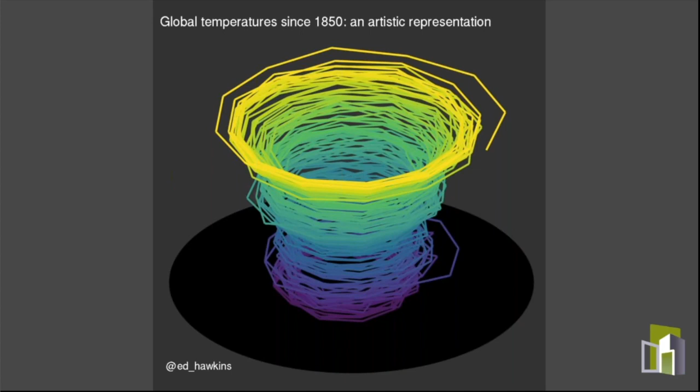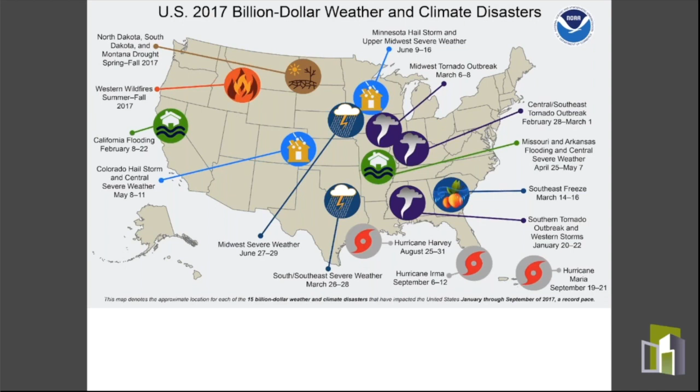And I'm going to start with the bad news. It's no secret that we've got ecological crises bearing down on us, a whole number of them in different ways. Global temperatures, for example, are almost literally spiraling out of control, as this amazing graphic representation illustrates. And the implications of this show up differently in different places. If anyone's calling in from Colorado, you may be suffering from the impacts of the horrible fires going on there. Really sorry about that. Seems like there's always something terrible going on somewhere, and more often, climate change is either a contributing factor or a factor making things worse.

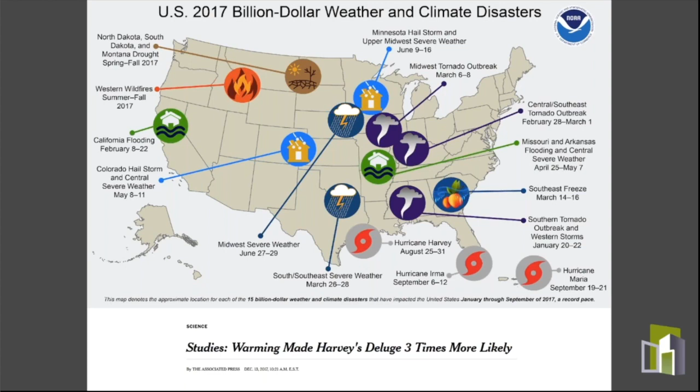This is sort of the pattern we're seeing these days: the climate is changing rapidly, and things that used to happen before are now happening more, faster, bigger, in ways that we weren't necessarily prepared for. And it really is happening all over the country, and there are very few parts of the US at least that are safe from one or multiple versions of these threats.

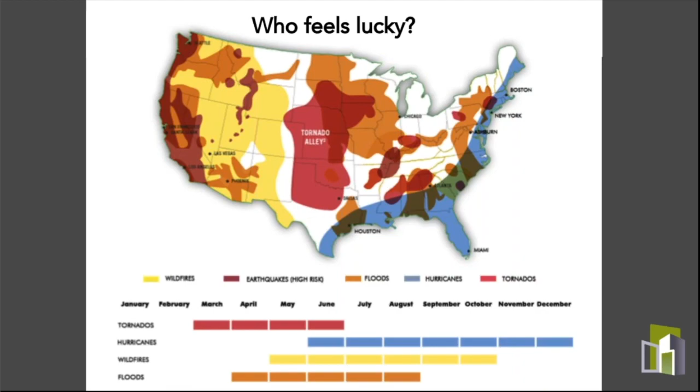And the threats are not just actual natural disasters and immediate physical harm, like drowning in a flood or getting injured, burned in a fire, but there are health impacts that are coming from all of these changes as well, whether it's disease vectors that are moving, whether it's extreme temperatures in areas where people were not used to those, or ozone impacts due to changing temperatures. All of these things are affecting air quality, affecting health in a whole bunch of different ways.

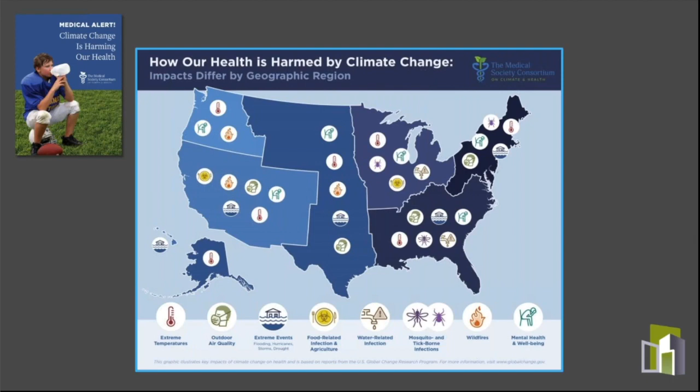And it all has to do with the fact that the kind of change that used to happen in geologic time over thousands and tens of thousands and millions of years is now suddenly happening within the span of a few years and decades. And our ecosystems and our bodies are having trouble keeping up. So that's the bad news.

The good news is that there's a lot that building materials have to do with both the causes and the opportunities for improvement in this world. And I like to think of the opportunities here in these four quadrants. I'm going to go into detail in each of these and just explain what's covered by each of these. Because if you cover all four of these, you pretty much are doing whatever can be done with materials to address human health and ecological and social impacts.

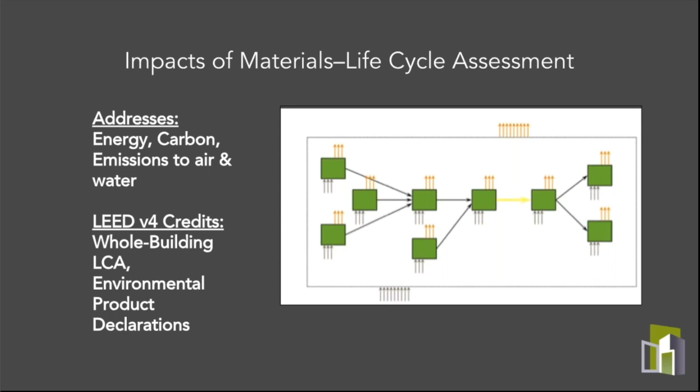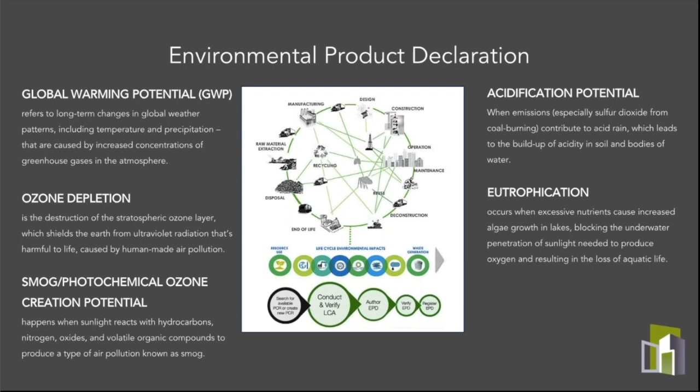So life cycle assessment really focuses on energy, carbon, emissions to air and water. And within LEED version 4, it's picked up through whole building LCA, whole building life cycle assessment, and environmental product declarations, which are a key part of what we're going to talk about here in terms of LEED v4 and product opportunities. So these are the impact categories that EPDs cover. We're not going to go into detail about all of that right now, but there's more where that came from.

One of the interesting patterns that you see as you look at this is we're often talking about carbon or climate change, carbon as a proxy or as a stand-in for climate change impacts more broadly. And in fact, in most cases, carbon or climate change impacts work as a proxy for all these other environmental impacts that are covered by life cycle assessment as well. So carbon works pretty well.

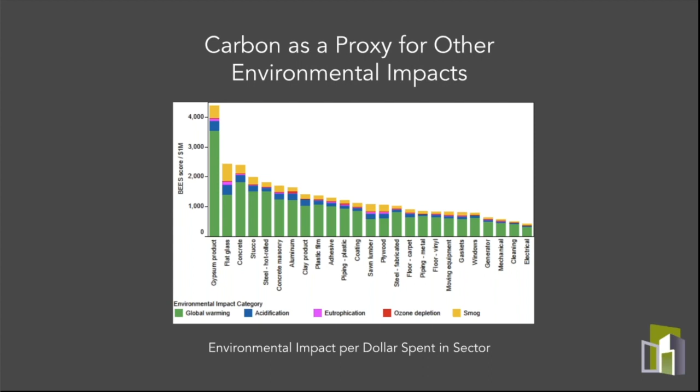Sometimes we interchangeably talk about carbon and LCA impacts, and it's not an exact one-for-one match, but generally they track pretty closely, which is handy. Now, it used to be that we didn't think that much about building materials in terms of climate change and carbon impacts, because we thought the real issue is in operating energy and the fuels that are burned to operate our buildings. But that's no longer the case for a couple of reasons.

Primarily because buildings are getting more efficient, and especially if you're watching this webinar, you're probably tied into the green building space, where leaders are driving towards net zero buildings. As we drive operating energy use down further and further, the embodied energy piece, which hasn't changed, looms larger as a part of the overall puzzle. Actually, in some cases, it has changed, right?

Because in order to drive operational energy down, usually we're adding layers of insulation. In order to add more insulation, we're adding framing, we're thickening up the envelope, we're adding photovoltaic panels, we're changing up systems. So in a lot of cases, we're actually growing that embodied energy piece in order to shrink the operating energy. And we have to pay attention to the trade-off there, because we need to cover both.

Embodied energy is important not just because it's the piece that's left over after we drive down operating energy, but also because there's a time factor here. Embodied energy is all about energy that's in products and materials that go into a building. All of that carbon is released right up front, when we're building the building, which means there's a huge plume of carbon happening right then, as opposed to the operating energy, which is released gradually over the life of the building.

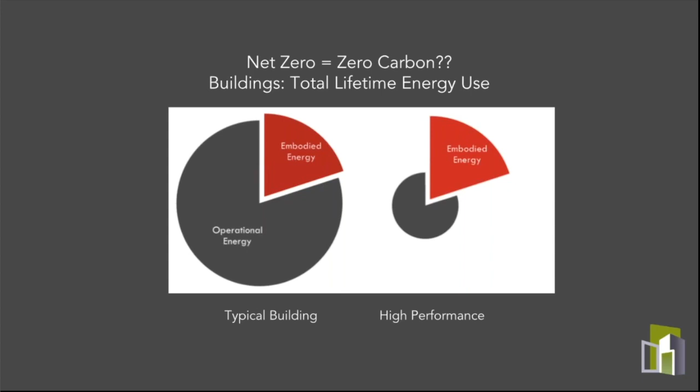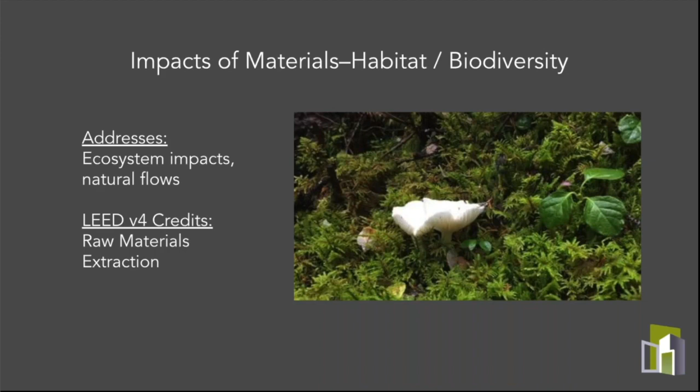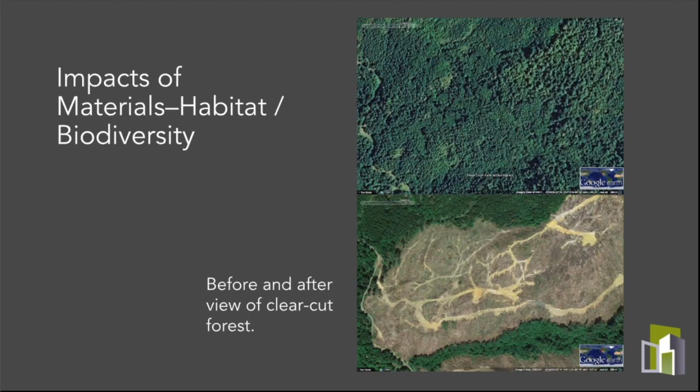Looking next to habitat and biodiversity, it's kind of self-explanatory: ecosystem impacts, natural flows. This is covered primarily in LEED under the raw material extraction credit. As an example, large clear cuts are a huge impact on biodiversity in that ecosystem, disruptive to habitat. We're seeing tremendous extinction across the planet, a combination of habitat loss and climate change impacts. So this is one piece of that puzzle, and for materials coming from places rich in biodiversity, this is definitely something to pay attention to.

Moving on to health. As I mentioned, health is tied to climate change, but also more directly tied to building materials through hazardous substances that might be in those materials. Depending on the system or program, sometimes we're also paying attention to exposure. In LEED version 4, there's a credit on material ingredients, and there's low emitting materials as a credit in the indoor environmental quality section. So it's useful to think about the ways potentially harmful substances can move from building materials into our bodies.

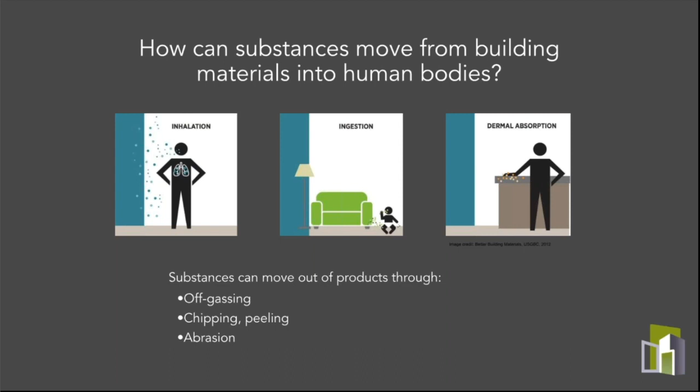Breathing them is big, ingesting them, especially toddlers playing on a carpet or chewing on a windowsill, right, with lead poisoning, and just through your skin. So paying attention to how these things are released into the environment from all these different sources, and how they can get absorbed or ingested into humans for those direct human health impacts is a key piece of what we're looking at in terms of these materials.

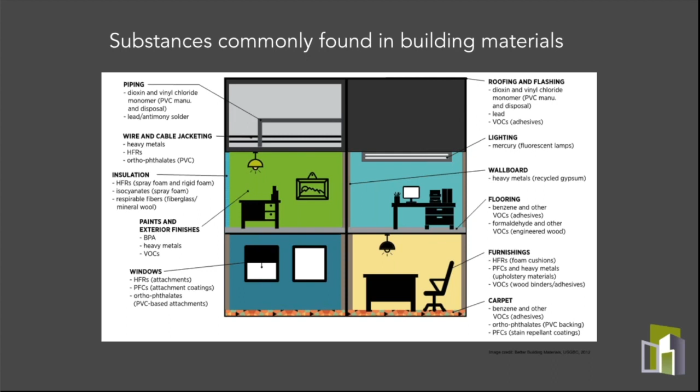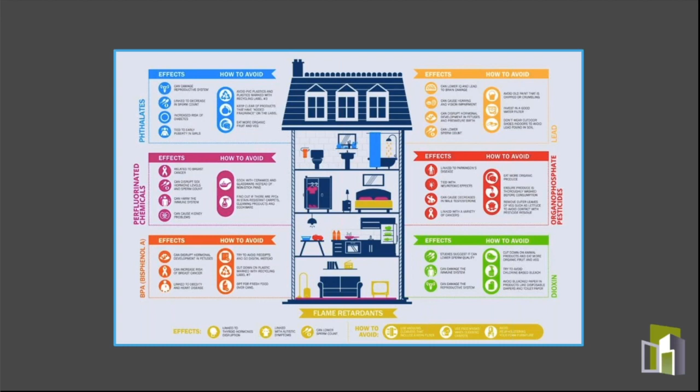So this is a master overview of where some of these hazards are found in building materials. You can also look at them in terms of categories: what are these categories of hazards, what effects each might have, where they show up in buildings and how to avoid them. So that's the context for the health piece. The final quadrant of these four that we're using to frame this whole picture is the story of social equity.

And so this is where we're considering things like fair labor practices, like, what are workers exposed to and how well are they protected, and what about corruption and that kind of thing in the workplace. LEED version 4 doesn't actually have a credit that addresses this in the core rating system, but there are a series of pilot credits around social equity, including one that's specifically about social equity in the supply chain, which is, of course, the supply chain is the materials and product supply chain.

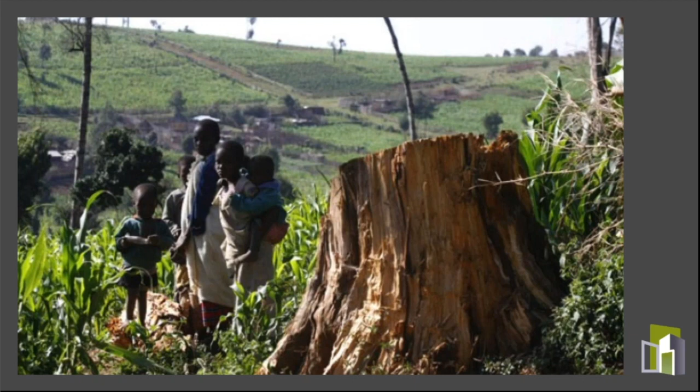So strongly encourage you to take a look at that as a way to start to think about this whole social equity piece of these issues and where they come from, because just in the same way as there are ecological impacts to the materials we use, there are social impacts to these materials and where they come from. And it's important to think about those and try to get a handle on how can we work with and pay attention to and then mitigate those as we look at

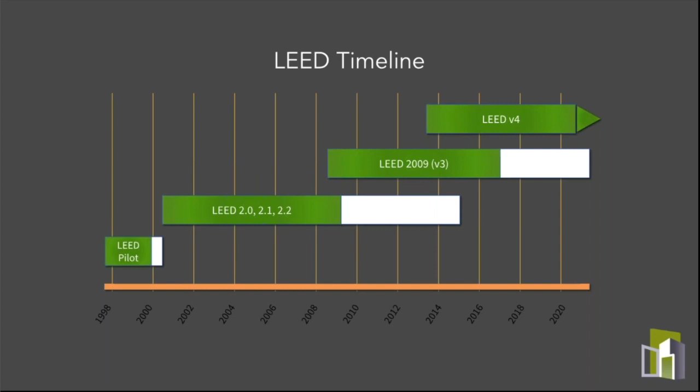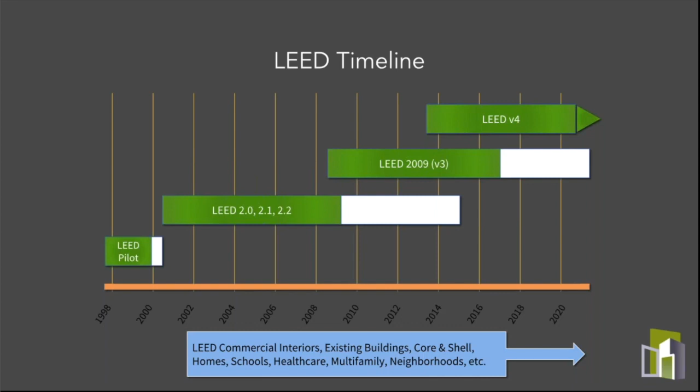Started out as a pilot in 1998, moved into a full rating system in 2000, and through all of the 2000s and into about 2013 with LEED version 2 and then LEED 2009 or V3, the materials and resources credits really didn't change very much. Through that time, we also had a whole bunch of additional market sector specific and variants on LEED introduced. So all of that's very much part of the mix as well. But throughout that entire initial decade and a half of LEED, in terms of products and materials, we were pretty much focused on recycled content and certified wood and regional materials and maybe rapidly renewable materials.

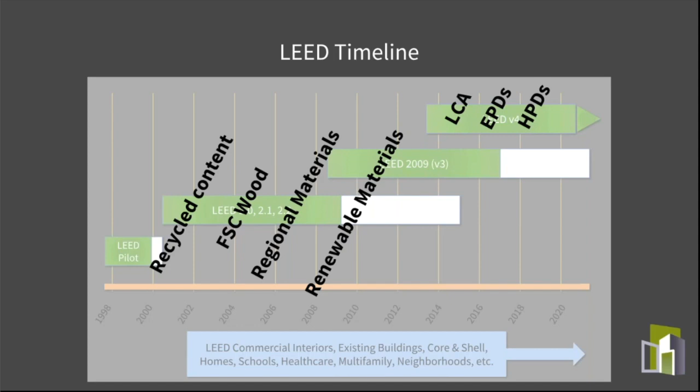With LEED version 4, all of that has changed. Now we have this kind of alphabet soup of new terms and concepts and things to think about. Life cycle assessment, environmental product declarations, health product declarations. That's what we're going to be going into some more detail here as we continue with this program.

And so the particular credits in LEED that cover these, there's 3 that fall under that umbrella of building product disclosure and optimization. That's the environmental product declarations, sourcing of raw materials, and then material ingredients. Those are the 3 BPDO credits. And then within indoor environmental quality, the low emitting materials credit is very much a part of this mix as well. And these are the credits that you have to pay attention to as you're looking to use LEED version 4 as a program.

As it turns out, these credits are not all created equal in terms of how easy they are to achieve. So we at BuildingGreen created this cheat sheet to help guide you through this. And what you'll see here is each of those BPDO credits, the building product disclosure and optimization, are a column here. So environmental product declarations, this first column, raw material extraction, the middle column, and material ingredients, the last one. And each of those credits have 2 points, one for disclosure and one for optimization.

But when you look at what you have to actually achieve in order to earn those points, there's some low-hanging fruit here. There's some relatively easy credits to achieve around disclosure for EPDs and disclosure for material ingredients, and also in the area of optimization for raw material extraction. So some pretty achievable targets there.

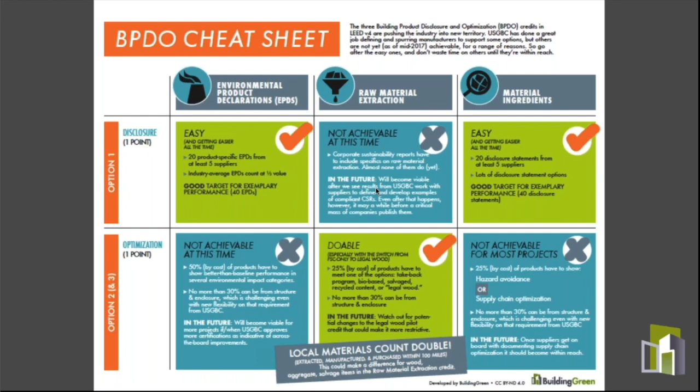But I also want to point out that LEED is not the only game in town. There's other programs that are really offering great guidance in terms of products and materials choices. So the Red List from the Living Building Challenge has guided a lot of, especially the really advanced and the more progressive owners, clients, and designers. And so essentially the Red List is a list of substances that are found in building products that you need to avoid in your project.

Living Building Challenge has other material-related imperatives as well, things like certified wood, things like the distance, right, for where these things come from. All of that is part of the equation as well. So there's a great framework there. We're not going to go into as much detail about that, but very much a part of the mix in terms of the overall product vetting challenge.

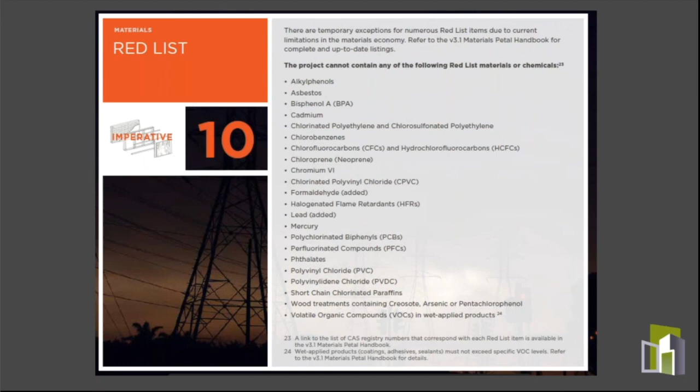And then another rating system that has been getting a lot of attention the last few years is WELL. And what's interesting here is that until last week, WELL did not have a materials category. It had a smattering of materials-related features. So things that are called credits in LEED are called features in WELL. It had a smattering of materials features scattered throughout the different categories or concepts in WELL, in particular air and mind.

Now, WELL version 2 just came out in pilot last week, and lo and behold, there's now a materials concept in WELL. And so they've consolidated all those materials-related features, whether they're preconditions that you have to meet or optional credits. And a lot of these do track pretty closely with things that are already in LEED. Some of them tie into Living Building Challenge, but there are also some variances there that you need to pay attention to. So stay tuned as we work to figure all this out.

And just want to make the point that we have to work on this together, right? This is the kind of thing where the crowdsourcing and collaboration goes a long way. If we take this us versus them approach to addressing these challenges and solving these problems, we're not going to get as far. So with that, I'm thrilled to turn it over to Anne to walk us through some specifics on getting to 20 products for those easy LEED credits.

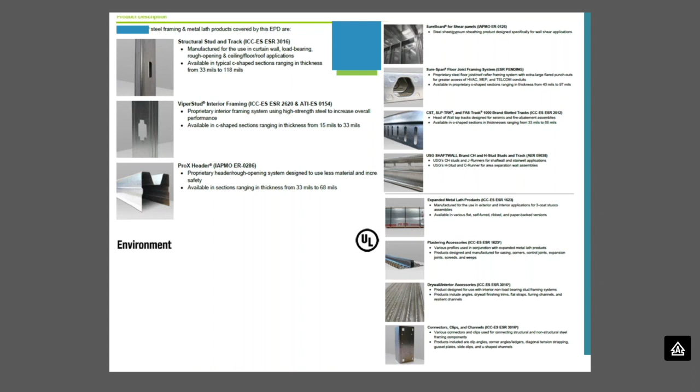It covers connectors. So there's a good chance that you're going to hit your limit on manufacturer in this category because you're going to have studs and headers and drywall bead in every single job that you do. So you're probably going to get to 5 of manufacturer X in the metal stud category, and then you can't use any more because you're limited to 5 per manufacturer in the LEED rating system. So disclosure in metal stud is a yes, and it's going to come with 5.

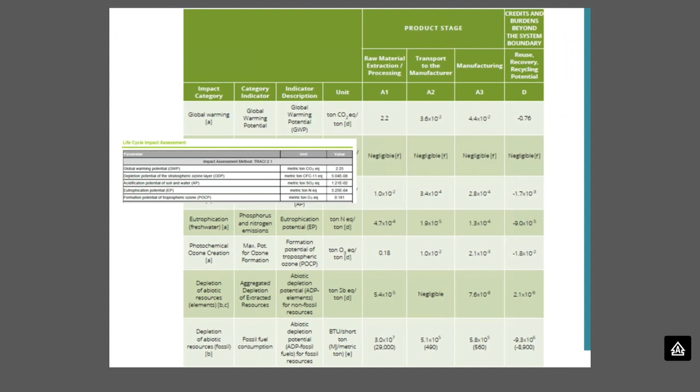If we talk about optimization, this is the guts of the EPD that's the generic EPD, and we could spend a lot of time talking about the specifics from various manufacturers, but here's what I learned. I compared 4. 2 of them were actually worse than the generic, which I didn't realize was physically possible, but apparently it is. And 2 of them were better than the generic, but not better enough in 3 categories, which is what's required by the LEED optimization credit.

So the short version of all this is, if you want to talk about optimizing from an environmental standpoint, when you're talking about things like metal studs, you should be talking about running a whole building life cycle analysis. And that's not a credit we're talking about today, but that is something we should all be doing regardless.

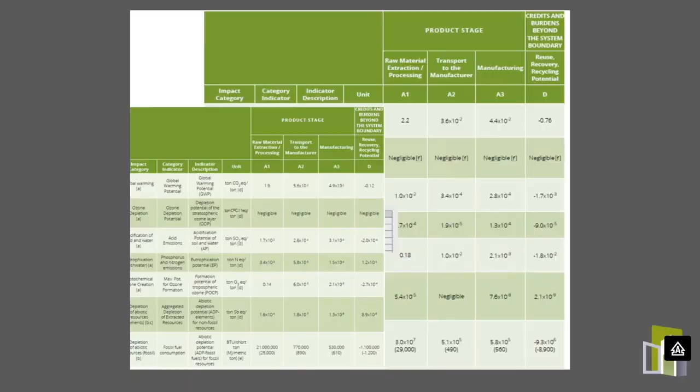The second topic in disclosure in LEED is material ingredients. In the category of metal studs, there are a number of manufacturers that have HPDs for metal studs. And again, these HPDs don't just cover the stud, they cover the tracks, the clips, the drywall beads. So when you see one, you have to remember, oh, this covers multiple products. So again, in terms of disclosure on metal studs, that's going to be a yes, and then you're going to get multiple products out of that.

Now, the thing to remember is 1,000 ppm is a disclosure level that is at a higher altitude. You see less. 100 ppm digs you far deeper, gets you more information. So the easy thing to remember is the smaller the number, the more information that you get. But I wanted to look more specifically at this, and before I did that, I wanted to make sure everyone had a basic understanding.

All these things have an LT1 to LT4 or LT-UNK. LT1 is the worst, very hazardous, avoid, and these are GreenScreen List Translator. LT stands for List Translator, and then LT4 is inherently low hazard. LT-UNK is unknown hazard, don't know enough.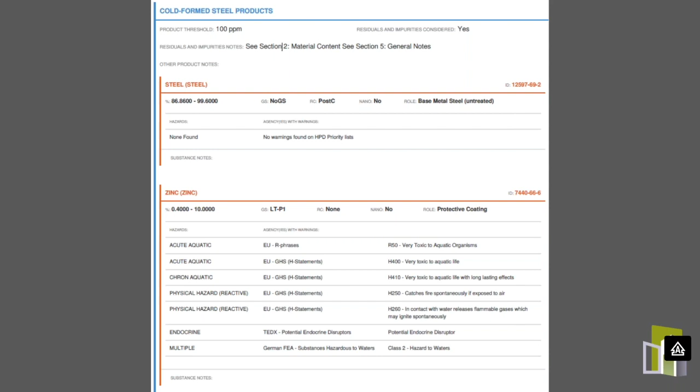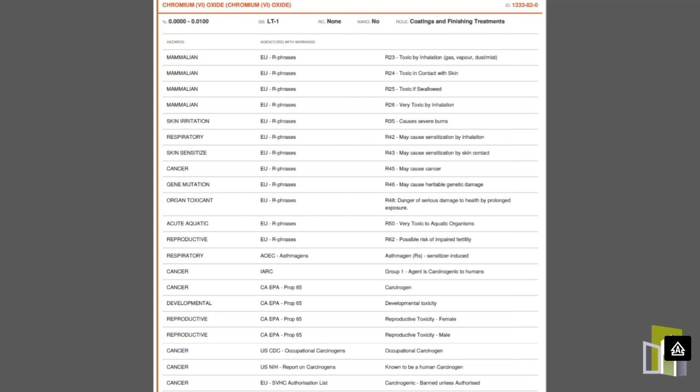What was interesting about this, though, was when you dug into the 100 ppm, there were so many more things. And this was the one that really got to me, chromium oxide. So chromium oxide is an LT1, and as you can see, it has pretty much every toxin known to man. It has a mammalian toxin, it's a carcinogen. It's an aquatic toxin, it's a developmental toxin, it's a reproductive toxin for both boys and for girls, and it goes on and on. There are 3 pages of this thing for just one chemical.

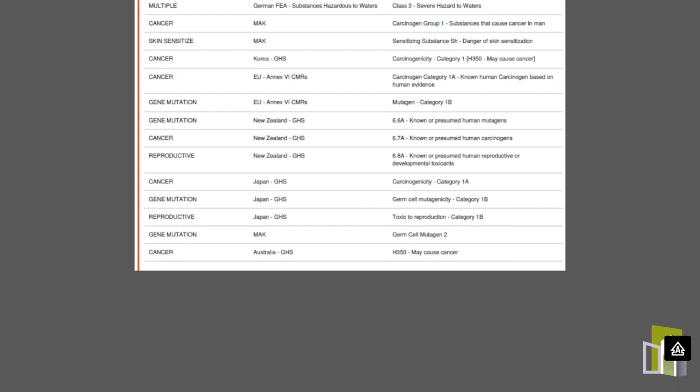And then you get to the end summary, which is products produced by MBA are classified as non-hazardous per OSHA. Processes such as cutting, welding, or brazing to modify or install the product can result in hazardous and/or combustible dust or fumes.

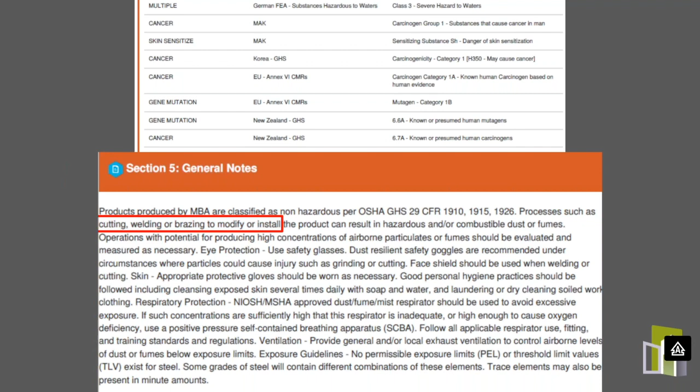So I guess our takeaway from this is truly it's okay to purchase metal stud and have them delivered to your job site, but you probably shouldn't install them because that will produce hazardous and/or combustible dust or fume. So I joke a little bit, but generally under metal stud, we should be thankful, and we should congratulate these

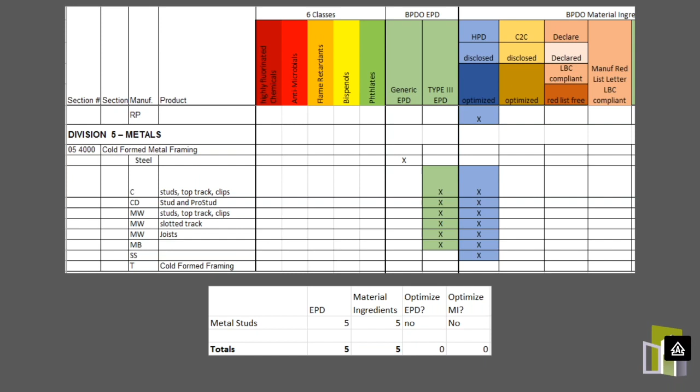manufacturers. There are 4 specific manufacturers that provide both a Type 3 EPD and an HPD, which allows us to get under metal studs. I think you're going to get 5 products under the EPD category and 5 products under the material ingredient category, which means that in one product, before we even get started, we are already 25% of the way to getting ourselves a LEED credit.

My next category is gypsum board. We now have metal stud wall. We got to put something on it. Gypsum board, again, have been leaders in this category. There are industry-wide generic EPDs available for glass mat sheathing products, for joint compound, and for Type X gypsum board. All three of those products are going to be in virtually every single project any of us do. Those are each worth half a point. We just got another 1.5 points in the EPD category.

But once the generics come out, all the manufacturers follow suit. There are multiple EPDs available in multiple products. There are a lot of Type X out there, which is the fire rated, the 5/8 inch gypsum board, which is what we use in most of our projects. 2 of those will allow you to optimize. They are that much better than the generic. They beat the generic requirements by 10%. So again, gypsum board, you're talking about getting more things.

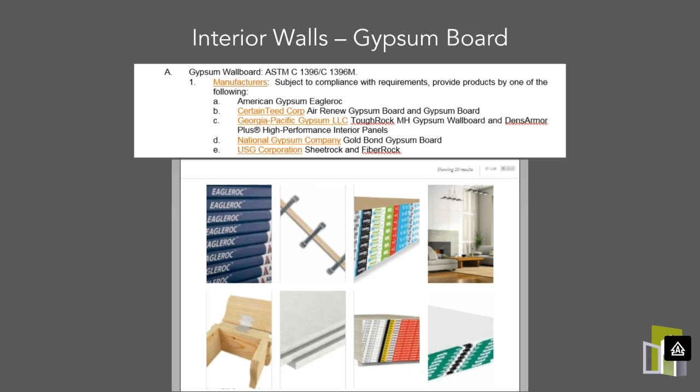When I talk about the health impacts of gypsum board, my first step is to go to BuildingGreen's website, because they have such great information on health impacts on their BuildingGreen approved portion of their website. So if you go there on designer pages, you can see a lot of great information, and those are my selections generally for what I use for gypsum board in my projects. But I also wanted to dig in to see, beyond the fact that I think these are good products and well worth using to just clean up our industry, whether we can get credits for these.

Again, in the category of gypsum board, there's a lot of HPDs available, and there are HPDs available for multiple different products. You can get HPDs for Type X gypsum board, which is your fire-rated gypsum board, for your shaft wall, for sound-insulated gypsum board, for impact-resistant gypsum board, and there's some products that are air cleaning. There's a bunch of different products. So again, you can get a number of different points in this category.

The interesting thing here was I think gypsum board is sort of a thing. It's gypsum squeezed between 2 sheets of paper. And so it would seem to me that every single manufacturer would have the exact same list of materials, because goodness gracious, it's a thing. It's made the same way. But what I was amazed at is that they had a very different set of products.

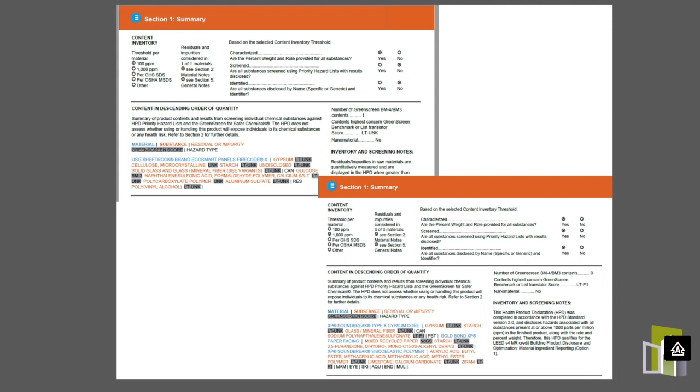In fact, the one HPD that's on the left of the screen right now, that one has absolutely no LT-P1s. All it has is LT-UNKs, and there's one BM3, which means using this product, you could optimize with this gypsum board. But the one on the bottom right didn't have the same stuff, and that really concerned me. And the one thing that really concerned me was the LT-P1, which is an ingredient in the bottom one, which is sodium polynaphthalenesulfonate.

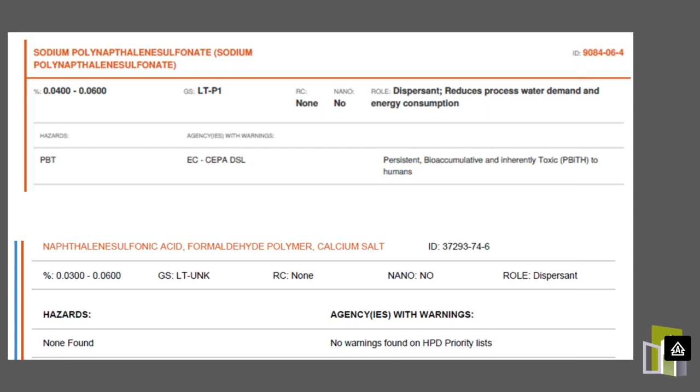So the interesting thing was this. Sodium polynapthalenesulfonate, which is an LTP1, was in about half of the gypsum board HPDs I looked at, and naphthalenesulfonic acid formaldehyde polymer calcium salt was in the other one. And if you look at the role that's on the top right of each of those screenshots, the role is a dispersant. And I'm sitting here scratching my head thinking, what is going on here? And so I called my favorite expert, who is Brent Ehrlich at BuildingGreen, and he told me that sodium polynapthalenesulfonate is on the red list.

Its CAS number's on the red list, but Brent explained to me that the 2 things, I'm not going to say that word again, they are both the same thing. They are just a different label for the same essential chemical structure, and those HPDs are going to be rewritten so that they're no longer available, and we cannot optimize for gypsum board.

My point that I dug into this like this was for this reason. There was a great white paper put out by the AIA Materials Knowledge Working Group, which both Nadav and I were involved with a couple of years ago, and it had a bunch of really great recommendations. But one thing you have to do is use recognized third-party documents, and do not claim to have expertise you don't have. I don't have expertise. I handed it off to somebody who has better information than I.

I also talked to a toxicologist friend of mine, and I'm going to trust the HPD that I see at the third-party document until I see a different third-party document. It's not my job to analyze what's going on. It's my job to read what I can see online and move on from there.

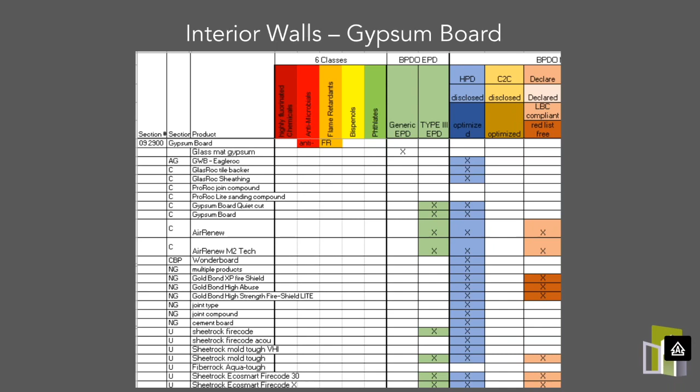But basically, interior walls and gypsum board. This is my tracking sheet that keeps all this straight for me. And here's where we are with our tally. So for gypsum board Type X, you can get an EPD and a material ingredient credit using an HPD. You can also get one for gypsum board mold tough kind of products. For specialty products, there is 1 EPD available. I think there's at least 3 material ingredients available.

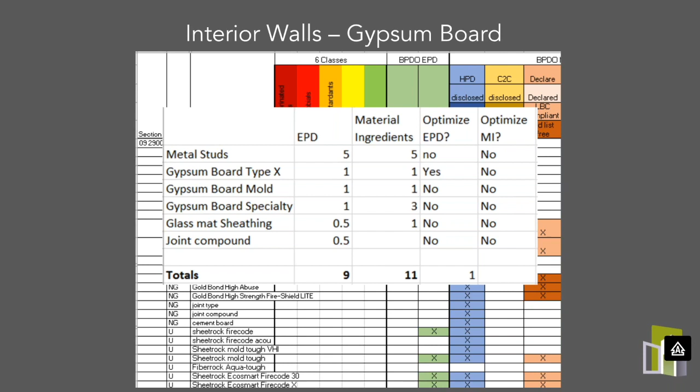And then for glass mat sheathing, you can have a generic EPD. There's an HPD available under glass mat, and for joint compound, you can get a generic EPD. So now we are at 9 EPDs and 11 material ingredients.

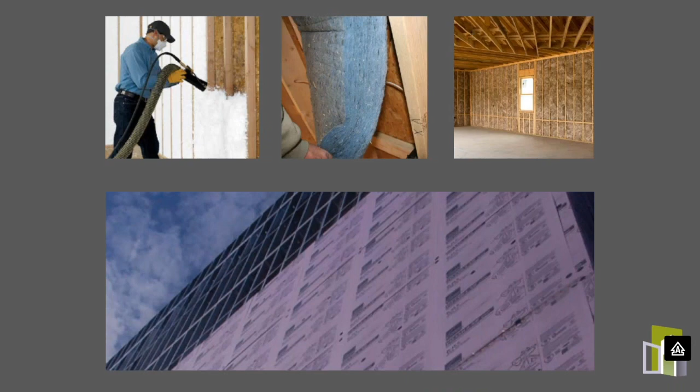Let's keep going. Insulation. This is another category that I don't think I'm going to have architects boss me around about what they want to use. There are numerous, so that's why I think it's a good thing that we can start talking about setting up base documents and base strategies for your office to help you find things and find your way to getting these credits and not have to waste a lot of time on them. There's a number of different types of insulation. There's blown in, there's various batt products, and there are foam boards.

That brings up a great document, and I wanted to just share this with you guys. If you put "does this item count as a product USGBC" into Google, this thing will be the first hit that you see on your screen. You can download the PDF. It's very handy. It's very helpful to understand how different functions and different manufacturers all key into different products. And also, if it's an assembly that's assembled on site, everything that is put into it is a unique product, all right? So that's a very helpful thing. And clearly, two different functions would be two different products. And that's what we're talking about now with insulation.

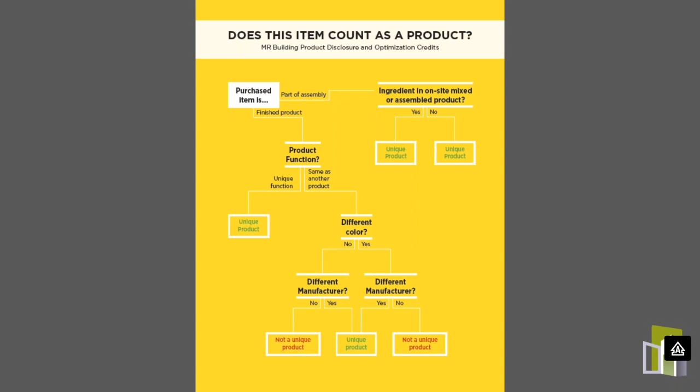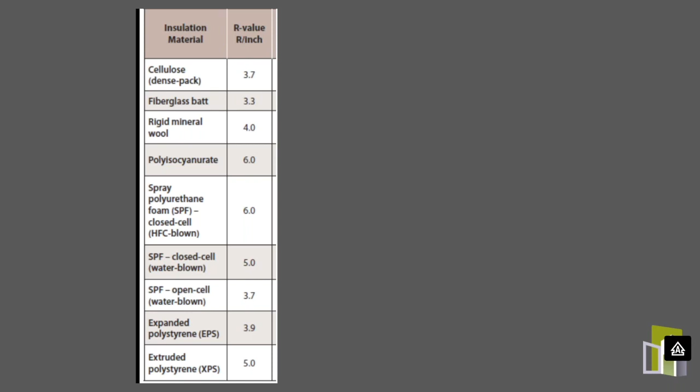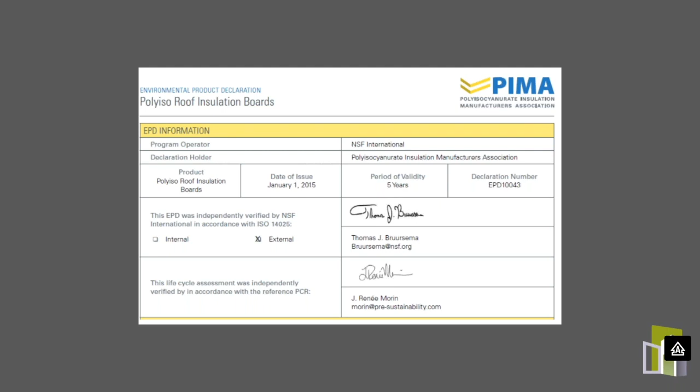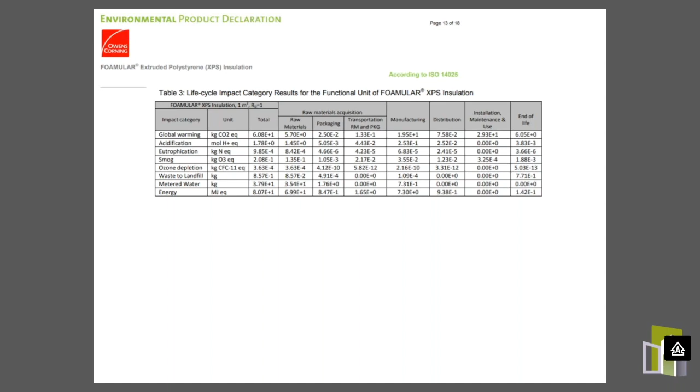The first thing I think about from insulation is the R value per inch. And clearly, the foam products typically have a higher R value per inch, which is why we like to use them so much. If we're talking about the foams, the polyisos have generic EPDs available. That's put out by PIMA, which is the Polyisocyanurate Insulation Manufacturers Association. But also, once the generic's out, then we see other folks coming out. There are also XPS insulations out that have product-specific EPDs as well. There are also product-specific EPDs for polyisos as well.

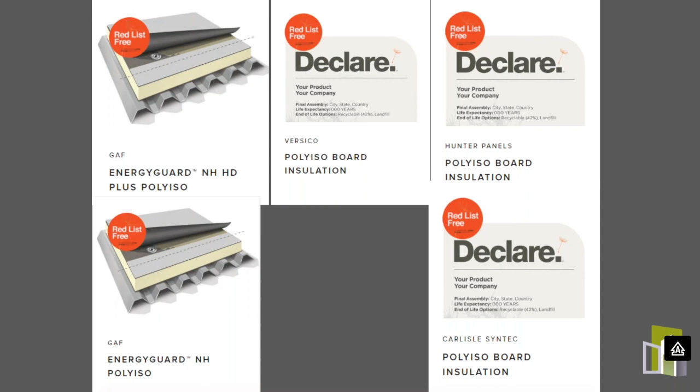From a health and material ingredient standpoint, there are a lot of Declare labels available. There are a lot of HPDs, and there are Cradle to Cradle material health certificates available for rigid. The one thing that we also want to consider now, BuildingGreen had a great article, I think it was like last week. My good friend Brent wrote it, about how now the polystyrene insulations are HBCD free, which is a long word I am not going to tackle, but these are flame retardants that we are trying to avoid. We want to put that information into our specs because the same manufacturers that have EPDs and HPDs, Dow and Owens Corning, are now bringing this stuff to market.

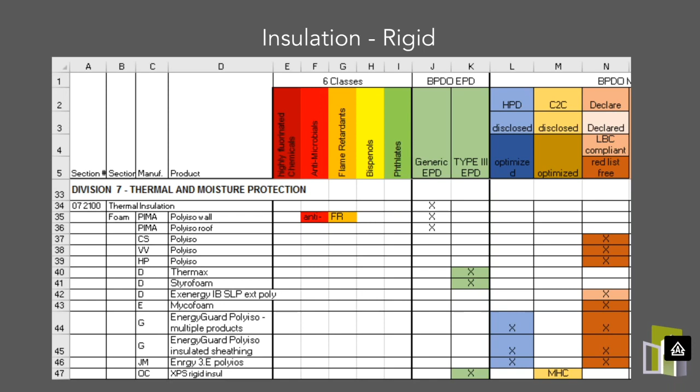And again, this is the pressure that we're all putting on them to say we want better products to choose from. The result is that we're getting better products. These folks are delivering better products to us. So for rigid insulation, you have a number of choices that you can hit all this on. You can get generic and Type III EPDs, and you can get both HPDs and Cradle to Cradle disclosure labels.

Now, the next thing I wanted to talk about was mineral wool. And the first thing I want to say about mineral wool is I want to put this chart up. There was a great study done. It was funded by one of the mineral wool manufacturers, but we shouldn't poo-poo it because it was done by Building Science Corp. It's John Straube.

And what they basically found was that polyisocyanurate does not function really well during cold or warm temperatures, which I think is really funny because, as we all know, the ASTM test, ASTM C518, is done at 75 degrees Fahrenheit, which I think is funny because 75 degrees Fahrenheit is pretty much the one temperature when you really don't need any insulation, but that's when they test the efficacy of insulation.

So what I tell teams all the time is if you are just trying to meet the energy code by using COMcheck, fine, you can use polyiso. But if you're actually trying to produce a net zero building and you're planning on testing your performance, your polyiso in the wall might not be performing as well as you think it's going to perform, and you might have a problem meeting that net zero requirement that you're trying to hit.

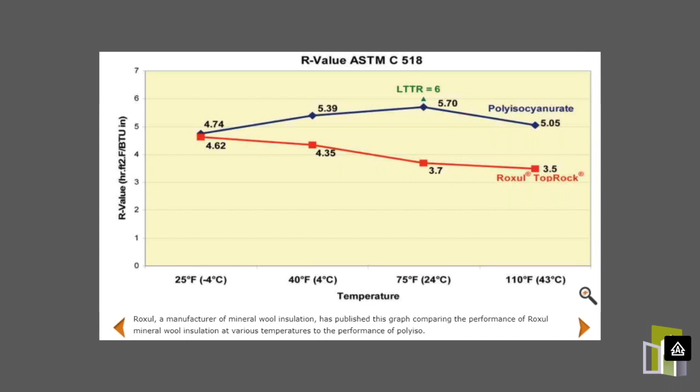This is great information. And actually, after the study came out, about 3 months later, PIMA, who are the trade association for polyiso, literally in their publicly available information, took polyiso down from 6.7 per inch to about 6.2. And I decided it was a direct result of what this study had said. Anyways, I think polyiso is very inexpensive. I get it. It's a very efficient insulation. It's not the be-all and end-all.

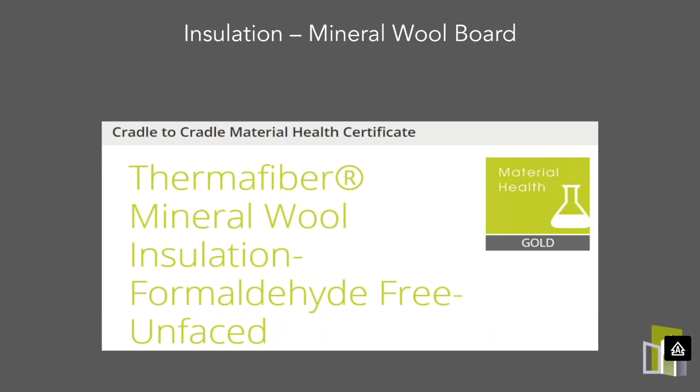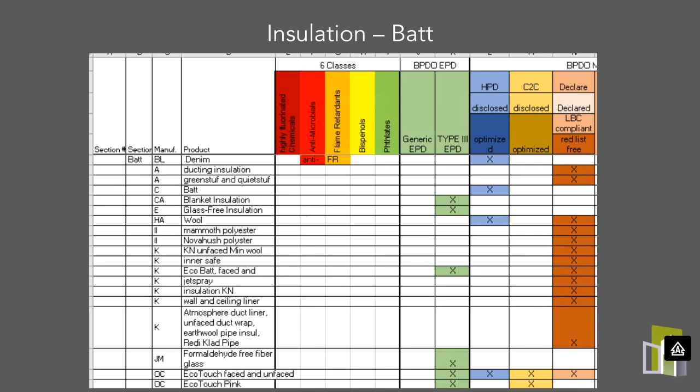Mineral wool is a great insulation. There are no EPDs available, but there are many Declare labels available. There are also Cradle to Cradle material health certificates available. I'm now going to get into batt. I've covered mineral wool. Batt insulation, there's a ton of really great stuff available. There's also insulation in other kinds of batt. You have denims, you have wools. There's a bunch of really wonderful insulations in this category.

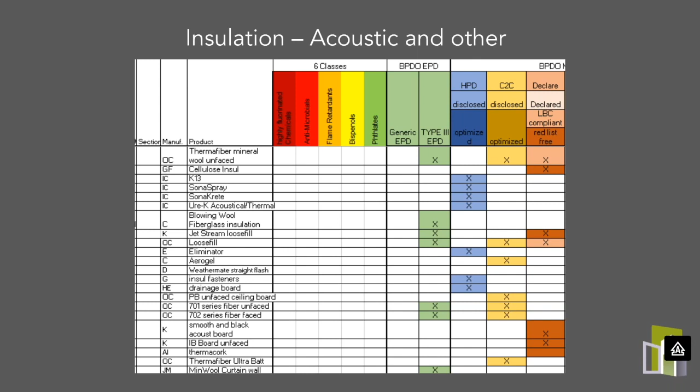And then the last thing is there's other insulations we need: acoustic insulation, some loose fill insulation. There's no reason in your insulation spec you should be putting anything in there that does not have full disclosure labels and is environmentally sound. You only need 3 choices. You have 3 in every single category. We need you to just tie this thing down, and then you're good to go.

You might notice I haven't mentioned spray foam. I am not a big fan of spray foam for a number of reasons, mainly because it's made of isocyanate, and it is a skin and lung irritant, and that is why the individual installing the spray foam looks like that when they show up on the job site, and they want everybody else cleared out. I'm not a fan of spray foam.

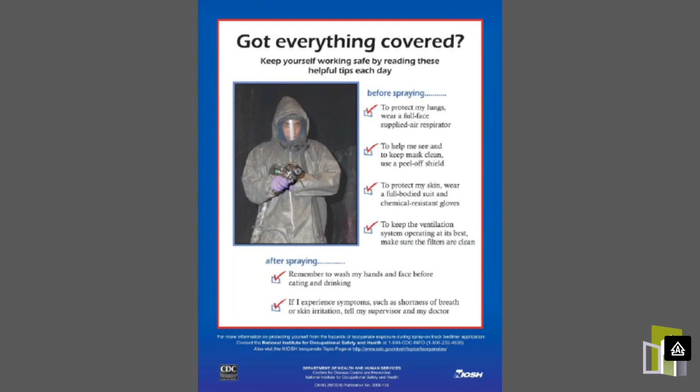I know people think it's an air barrier as well. If you lay it down in 1.5-inch increments and put 5 layers down, then it's an air barrier. If you lay it down quickly, which is what a lot of folks will do, it's basically going to be an air barrier to get you through your air barrier test, and then it's going to crack. And again, if you're looking for long-term performance, it might not perform for you.

So insulation, if you go through the insulation here, I gave you one credit in each category for extruded poly, because you're going to have perimeter insulation under your slab or at your foundation wall, typically on every job. I gave you polyiso because you're probably going to have that on your roof. I gave you mineral wool because I'd like you to have that in your cavity wall, your exterior insulation.

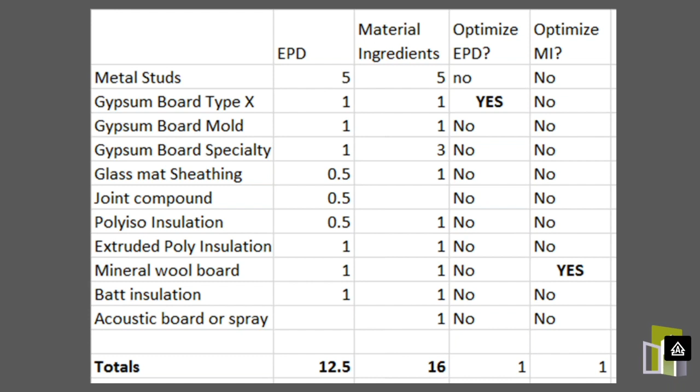It's great as a continuous insulation. I gave you batt insulation because there's probably going to be some of that in your stud wall. And I gave you acoustic board because you're going to have some other stuff as well.

All right, what else? I love this picture of the Kern Center because it says everything you need to know about material selection.

Stop choosing so many materials. If you're all sitting at work, under your feet right now is likely carpeting, and under that carpeting is likely concrete. And what's wrong with the concrete anyways? There's some beautiful concrete polishing products that are available. If we use those in our hallways, in our back of house spaces, in some of our lighter duty spaces, it's a great solution. This is a beautiful picture because you can see everything the building is built with. There's no ceilings, everything's exposed.

But I know I'm not going to convince you of this. Probably. Hopefully I can convince you. You're going to have to put some stuff in. So let's see. I wanted to get us to 20. If you use concrete sealer, that is a no-brainer. You're going to have that on every single job. There are numerous HPDs available for concrete sealer.

Polished concrete, again, polished concrete is a system that uses multiple products. You're going to need a densifier. You're going to need a grout filler. You're going to need a couple of sealers. I gave you 2 on that for material ingredient.

Flooring adhesive. If you're going to put anything in your building, some carpets, although we like to put those down with those removable pads, carpeting, any of the vinyl floors or any of the rubber floors, base, all that's going to need an adhesive. Those things all have Cradle to Cradle Gold certificates.

Yes? Hey, Ann, this is Nadav. I'm going to jump in for a minute because we had a question from somebody who might be having trouble following, and so I just wanted to clarify. They're asking, what does half of an EPD mean? Half of an EPD is a generic industry-wide product. So when you have joint compound, the Gypsum Association of America is giving you a generic EPD that covers all joint compound made in this country, as long as they go by this requirement, that gets you half a point.

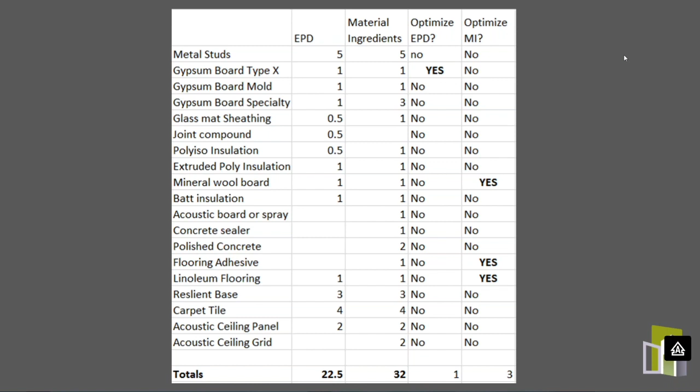And also I want to make a point that we have to keep pushing, because the fact that we've been asking for 4 years is why this stuff is here. And we're now starting to get solutions. So now we can sort of solve the problem of the metal studs that are going to kill us if we actually install them. And the gypsum board, every kind of gypsum board, no matter how you structure it, is going to have some sort of LT1s in it, which are toxic materials.

The reason I'm doing this is the CDPH, which is the California Department of Public Health. The CDPH document covers everything. It covers paints and coatings, adhesives and sealants, flooring, ceilings, walls, all the insulation, and it covers, if you're at a living building, anything that's an interior product, anything, okay? Living building takes it down. And the key piece to remember is Green Guard Gold. If you're Green Guard Gold, you comply with CDPH, which is a really good shorthand to keep in your head.

Now, if you aren't Green Guard Gold, you still might comply with CDPH, because there's other ways of showing that you comply with CDPH. But to keep in mind that Green Guard Gold means you comply with CDPH is critical. You have to remember that the no methylene chloride and that other long word, that covers paints, coatings, adhesives, and sealants. And then you have to keep in mind the SCAQMD rules. There's one rule for wet applied paints and coatings. There's one rule for wet applied adhesives and sealants. And then there's all this kind of mushing together.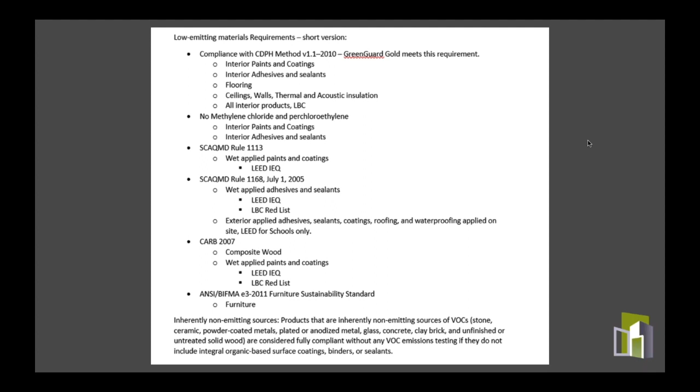Also, actually, if I could just point out to you, that paragraph is right in the credit language now as well. They may have added it. Yeah, it's right in. Right there. Yeah. Sorry. Go ahead. That's very important. Just keep that in mind.

All right. Next slide. How we can help. I've been doing this business for about a year and a half, and we've been working with Nadav on a couple of projects. We can do a couple of things. I can review specs. I can write specs. You can write your own specs, but I wanted to make a couple of points for my strategies for spec writing about what are critical things to do. You have to get it in your spec. I know spec writing for some people is frustrating and it seems hard and scary. It's a very large book, but you got to get the information in. If you don't get the information in, you're not going to get it in the job.

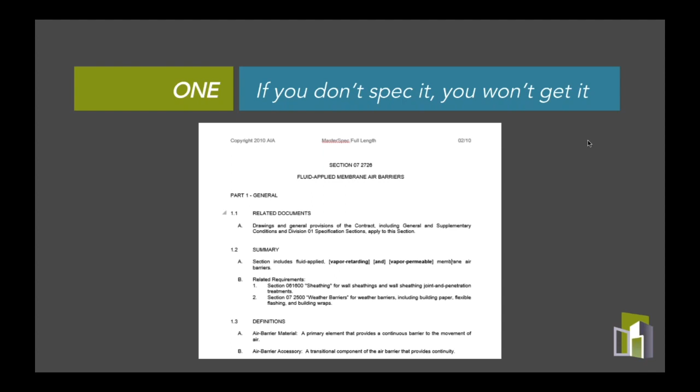Click. Division 1, nobody likes Division 1. There's a bunch of key pieces in there, and my big piece of advice right now is under WELL Air 25, which is the toxic material reduction credit, which is now Materials X10 as of last week in WELL version 2. All of that stuff belongs in product requirements. That's a Division 1 requirement. You want to make sure you get product charting, product data forms into Division 1 so you can get this information from your contractor.

But also, it drives me crazy that these manufacturers have Living Building Challenge compliant products and it's a secret. So on your screen is the letter from Technical Glass Products saying that FireLite and FireLite Plus meet Red List requirements, Living Building requirements. FireLite Plus is the fire rated glass that can be less than 100 square inches, so it's a 3 by 33 inch little long rectangle in your fire door. It's non-heat resistant because it's smaller than 100 square inches. It is Living Building Challenge compliant. I don't know why that's a secret, but the only way you figure that out is if you ask the manufacturer for a letter. So click.

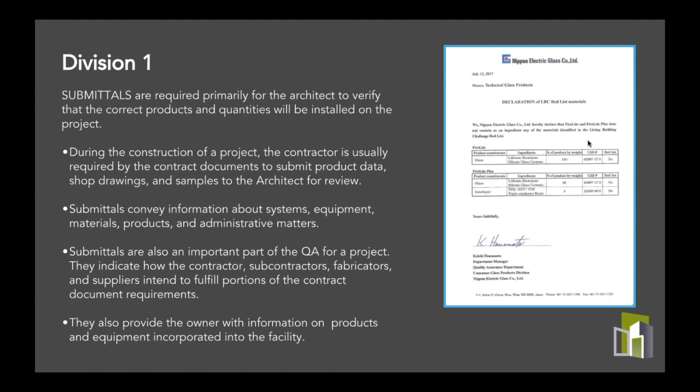What we have to talk about are submittals. There are two kinds of submittals. Action submittals are things the architect has to take action on. They have to stamp them and say approved, approved as noted. Informational submittals do not require an action by the architect. So they're just for your information.

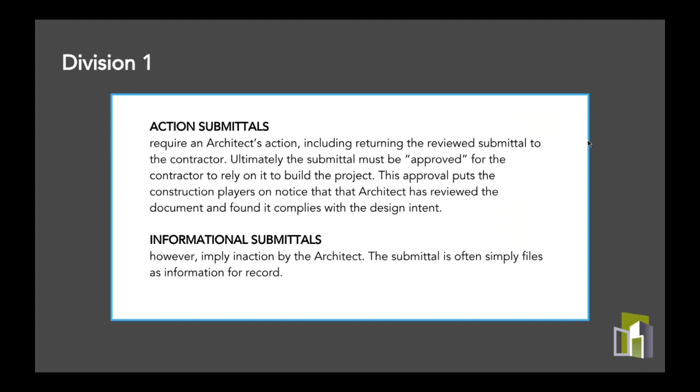Click. The informational submittal you need to put in your documents is: I want to know building product disclosure requirements. Specifically, provide documentation confirming no red list chemicals are present. If you put that into your document set, you can start collecting this information. You can collect it and put it over in a pile. It's an informational submittal. You have to take no action on it.

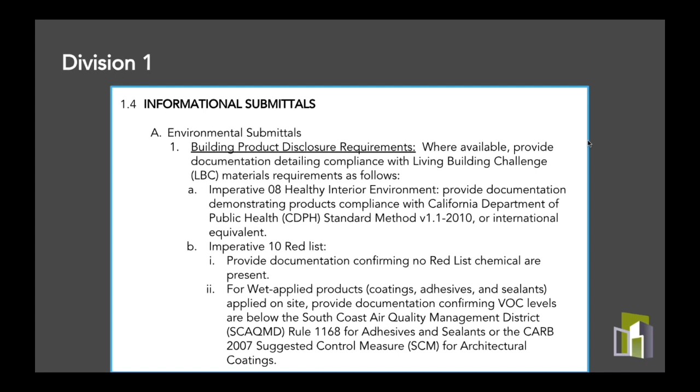You pile it up, and then this summer, you hire a very nice high school student to come in and figure out and get all this stuff organized into an Excel doc. Probably the high school student will know about some app that can do that automatically. So it's easier for them, easier for you, and you get this huge database of information all stored and ready to go. That's where you can then go and look for your better materials. But you have to ask.

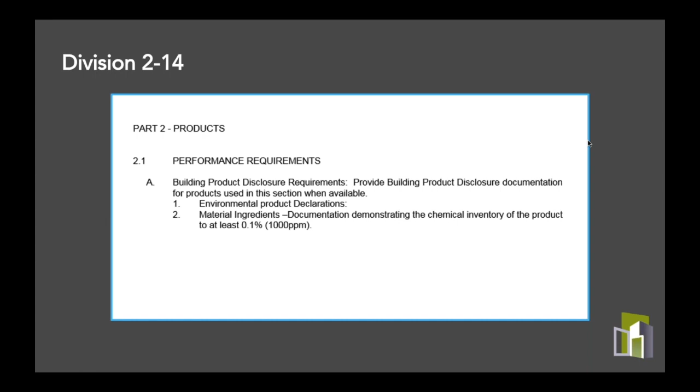That's the critical piece. Performance requirements, you need to put those in as well. And those go in: we want building product disclosure information for this job. And click. And the last thing is payment procedures. You have to tell the contractor you want this tracked, and you need that information monthly submitted with their payment request. If you tie this to cash with a contractor, you will get their attention.

Click, and that's the sentence you want to put in: Provide the environmental product data submittal form each month with your payment request. Click. That's it. That's on my website. Go to longgreen.specs.com, top right corner, resources, Green Engineer, which is where I kind of grabbed this, and I think my version's better, but we could discuss that later over drinks. It's on their website as well. It's in a couple different places, but that is available, or you can make your own.

But the notion is that the contractor gets this as an Excel doc. They use this the way they used to track recycled content. They use this to track what they're doing, and they're good to go.

Click, you're up, Nadav.

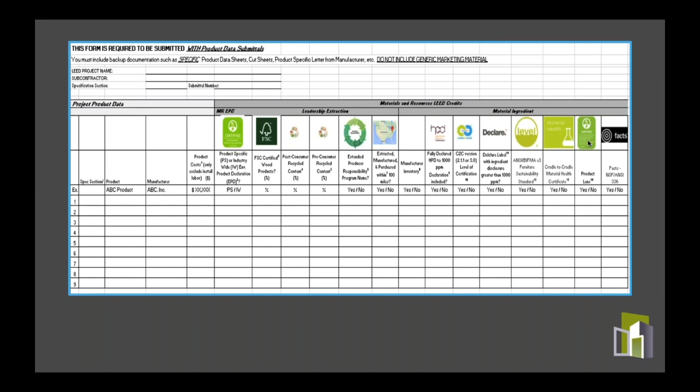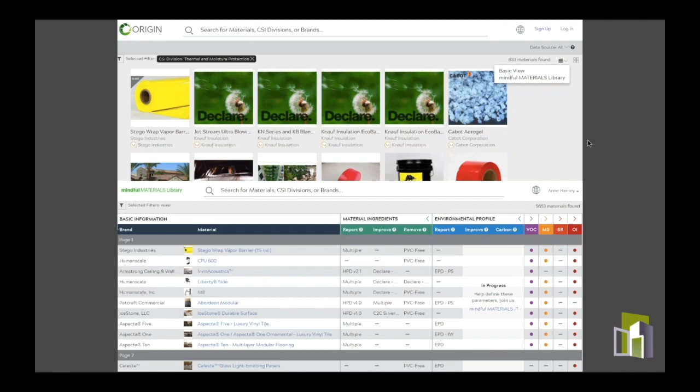I'm going to just quickly walk us through some resources that are out there to find products that meet these different requirements. Some people hopefully know about the Mindful Materials program, which is now built into the Giga Origin database. And this is a great resource for finding products that meet a lot of these specific requirements. You can filter and search on a lot of these different options and find products. There's both within Mindful Materials proper. You can also go to the Giga Origin database and find a larger set of products that might meet the requirements but haven't been vetted by the Mindful Materials team, of which we're a part.

UL also has their own products catalog, and you can go in and filter by products that have certain certifications or meet the requirements of certain programs. This is great, especially for EPDs, because UL actually produces a lot of the EPDs for companies, but they're also tying into some of the sources for other kinds of products as well. So those are aggregators. Those are databases that are trying to aggregate products from a bunch of places. You can also go right to the horse's mouth.

For example, for health product declarations, you can go to the HPD Collaborative website and look. They have their own database of all the published products, the repository it's called. Declare Products has a great database now, and you can search for different types of Declare labels, including a really useful filter: just show me Declare labels that actually meet the requirements of LEED version 4, because due to some weird technical reason that we don't have time to get into right now, most but not all Declare labels count towards the LEED v4 point. So that's something you want to pay attention to.

And Cradle to Cradle is huge in LEED. They're a big part of these other programs as well. And they have a registry as well. So you can go right to the programs themselves, or you can go to some of these aggregators.

We at Building Green have partnered with Designer Pages, which is an online library of products. And we're not at this point trying to aggregate all of the LEED related information you might need. I think Mindful Materials and UL and others are doing a great job of that. But what we do here is we provide collections of products that we have vetted and filtered and determined, taking all 4 of those quadrants I mentioned and all the information we can find into account. These are the preferred products that we have in each of these categories.